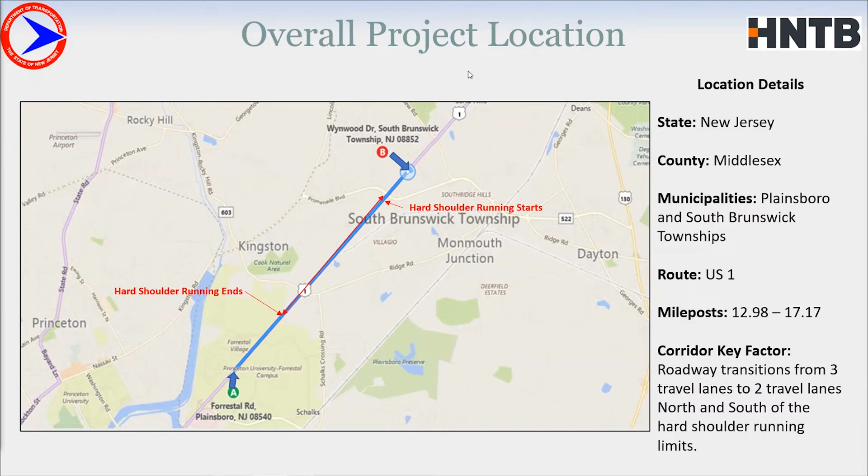With this, now I will give the charge over to Jose to run and describe the next few slides.

Jose, you're next. Thank you, Wasif. Good afternoon, everyone. The problem in this corridor was high congestion during peak periods in this area. This was, as Wasif mentioned, attributed to a bottleneck as the roadway transitions from 3 lanes to 2 lanes, both downstream and upstream of the corridor. There was a need to expand capacity in this corridor, so initial looks at widening the roadway determined it would be too costly due to requiring right-of-way acquisition, utility relocations, both overhead and underground, and the construction itself. Other issues, such as many environmentally sensitive areas, also deterred this strategy.

So other solutions had to be considered to solve the problem. Since the roadway has the 2 travel lanes as well as a shoulder, the hard shoulder running TSM&O strategy was implemented to maximize the use of existing roadway capacity during peak periods to alleviate congestion. Next slide, please.

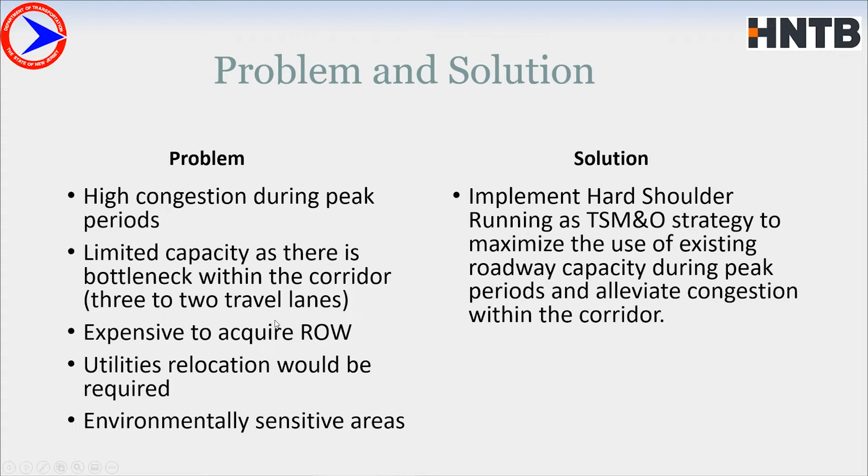There was a high risk of implementing this strategy on the arterial, which has so many entry and exit points, so an initial pilot project was first deployed.

This pilot project allowed the use of the shoulder within the corridor during both AM and PM peak periods for passenger vehicles only. Static signs were deployed advising motorists of the allowable use times and restrictions throughout the corridor.

Due to the high number of driveways on this arterial, signs were also deployed at all exiting driveways to alert motorists of the shoulder use and avoid any issue while exiting onto the shoulder.

Temporary utility pole mounted cameras were installed to monitor traffic conditions and the use of the shoulder during operation. All signals and radar detectors throughout the corridor were optimized for this strategy.

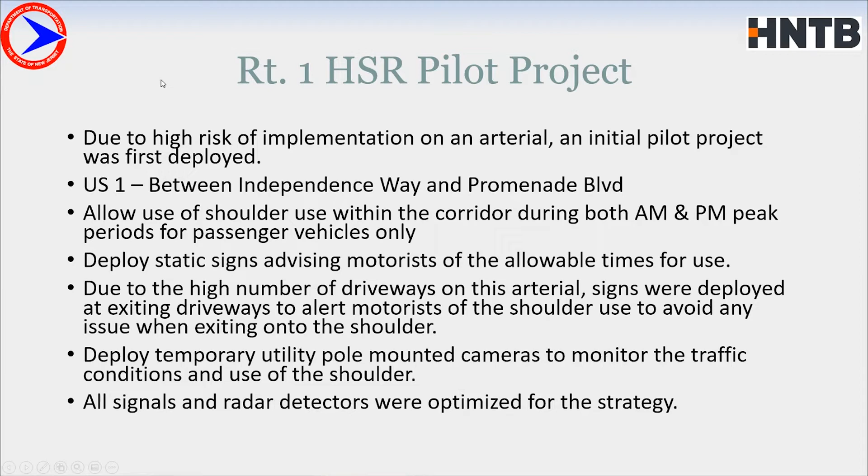A few months after implementation, an assessment of the pilot project showed improvement in conditions. This report represents a before and after congestion analysis during the same time period using data from the RADARS tool.

As you can see, vehicle speeds increased during the peak periods, and the key bottleneck located at Ridge Road saw a reduction in congestion. Travel time decreased during peak periods, as well as delay costs.

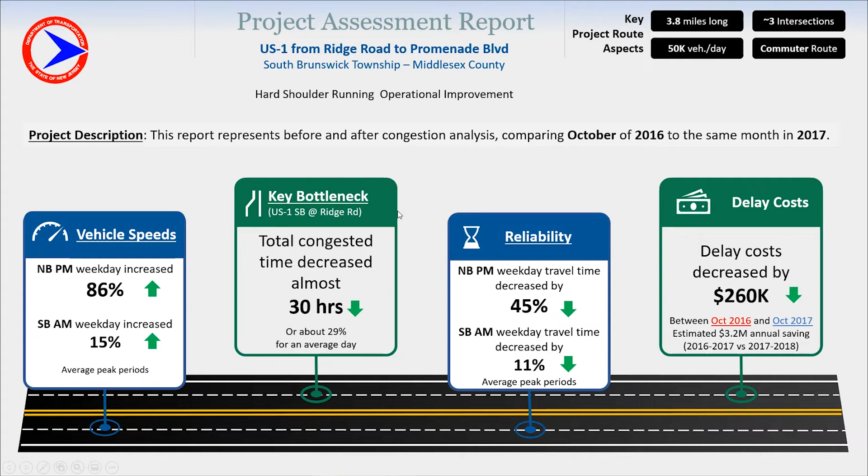Here you can see a side-by-side comparison of before and after the pilot deployment. Both the AM and PM peak periods showed improvement in both travel directions after the deployment.

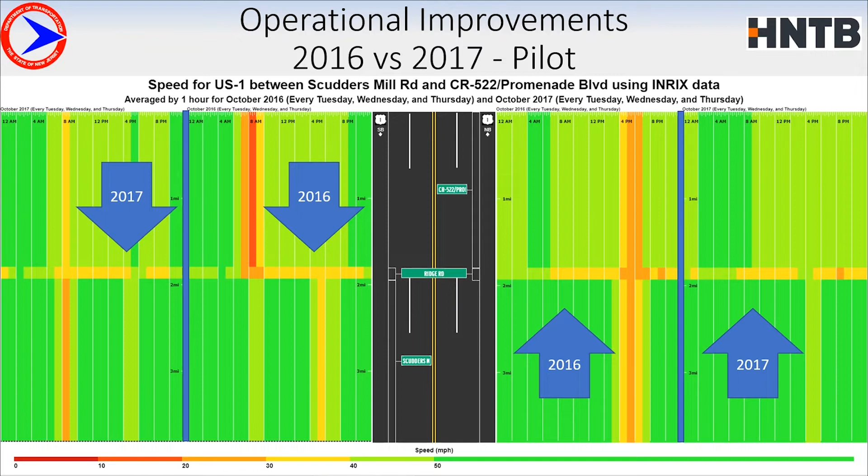Given the success and benefits found from this deployment, it was determined that we would proceed with a permanent solution. My colleague Hiren Kumar Patel will now go over the permanent solution project details.

Thank you, Jose. Good afternoon, everyone.

After having a successful pilot program, we decided to implement hard shoulder running as a permanent solution utilizing ITS devices. The HSR system operates autonomously and is compatible with the existing NJDOT traffic management system.

We decided to provide signage at the advance of the segment, throughout the HSR segment, and also at the end of the segment at constant intervals.

Most of our mobility engineering projects are limited in scope, where we try to avoid impacts to right-of-way, utility, and environment. As a permanent solution, we decided to include lane use control signals, CCTV cameras, and dynamic message signs using our existing fiber communications.

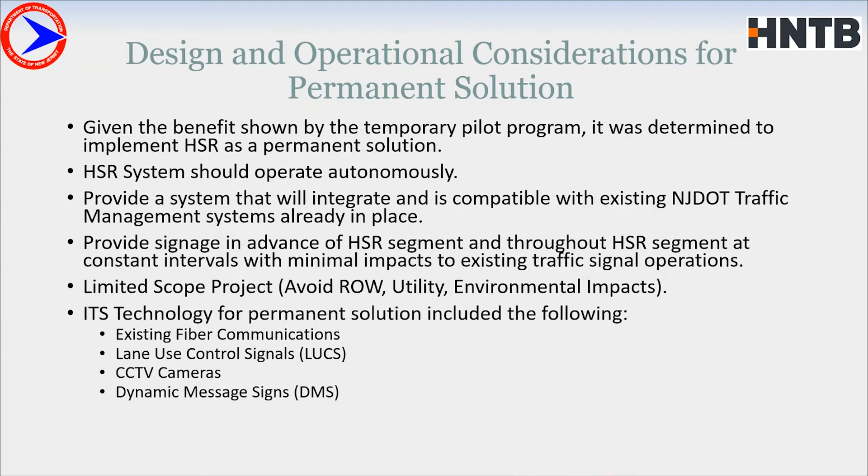Unlike a static sign, lane use control signals provide a clear indication to motorists of whether the shoulder is open or closed. They operate autonomously 24 hours, indicating a green arrow when the shoulder is open and a red X when it's closed.

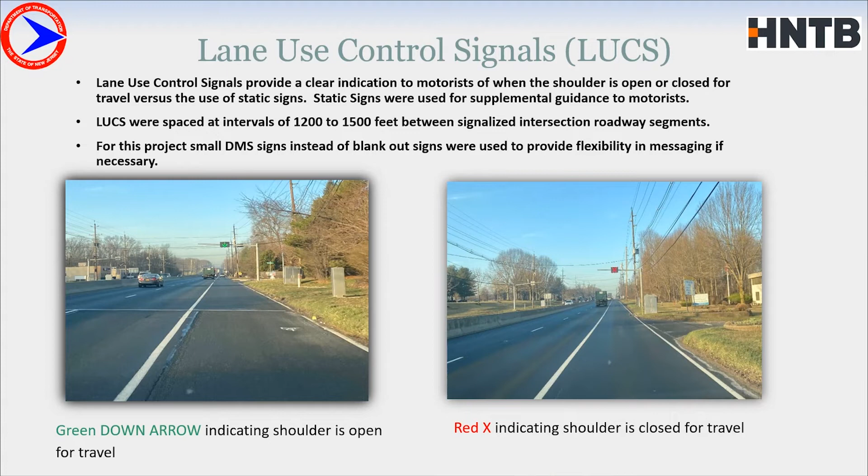LUCS signs were spaced at intervals of 1200 to 1500 feet between signalized intersections. Instead of a blank-out sign, we used a small Daktronics DMS sign, which was easy to integrate into our Daktronics Vanguard system and also provides flexibility in messaging if necessary.

Each LUCS sign includes a fixed pedestal camera on the LUCS side to provide visibility of the shoulder lane at all times and ensure the shoulder is safe to travel for motorists.

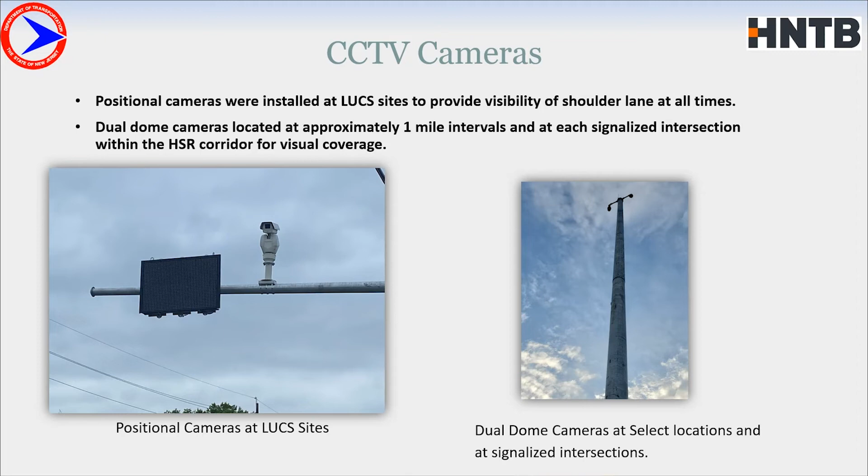DMS signs were installed at the advance and at the end of the HSR segment to provide advance notice for the hard shoulder as well as for other travel incidents. We had to install ground-mounted DMS signs where we had overhead issues.

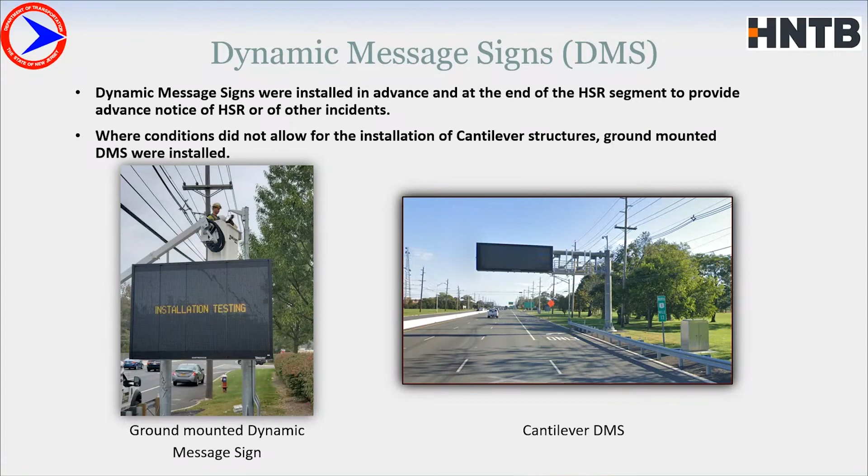Challenges: every project has its own challenges regarding utilities. We either have an overhead issue or an underground issue. In our project, we had to deal with both.

The deployment was on an arterial roadway, with utility poles on both sides, signalized intersections, and, as Jose mentioned, driveways as well. We also had very limited right-of-way through this corridor.

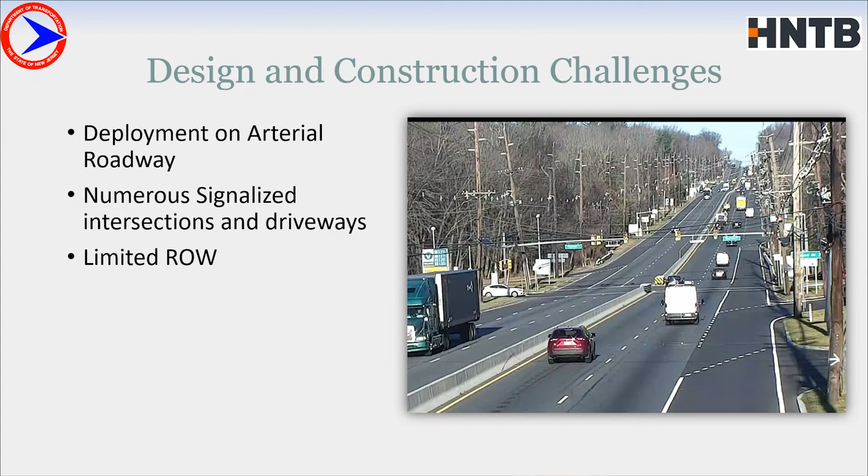As you can see in the sketch, there are a number of overhead utilities, and we had to ensure compliance with OSHA guidelines and our state statute requirements. Similarly for the underground utilities, we met the clearance requirements per utility guidelines.

There were some sites in environmentally sensitive areas, so we had to obtain all necessary permits. During construction, we also encountered sites with shallow rock, so we either had to relocate the site or use special equipment for foundation work.

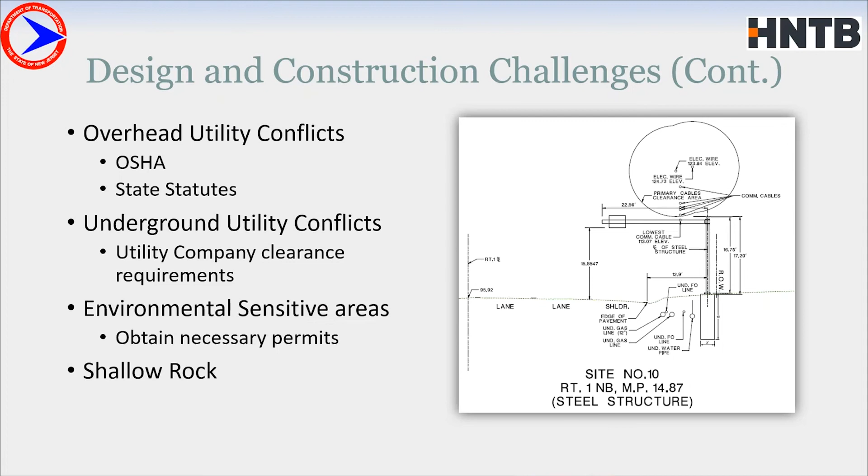In summary, total construction cost was about $5.2 million, and construction length was about 24 months. In total, we installed 14 LUCS signs, 25 cameras, and 4 DMS signs.

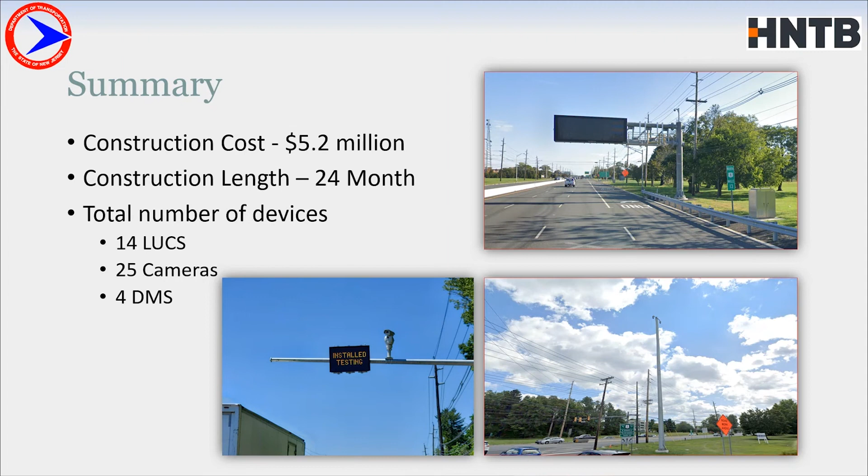These are some additional pictures of the final completion of the hard shoulder running project, showing the LUCS sign and some additional static signs that we installed as part of our project.

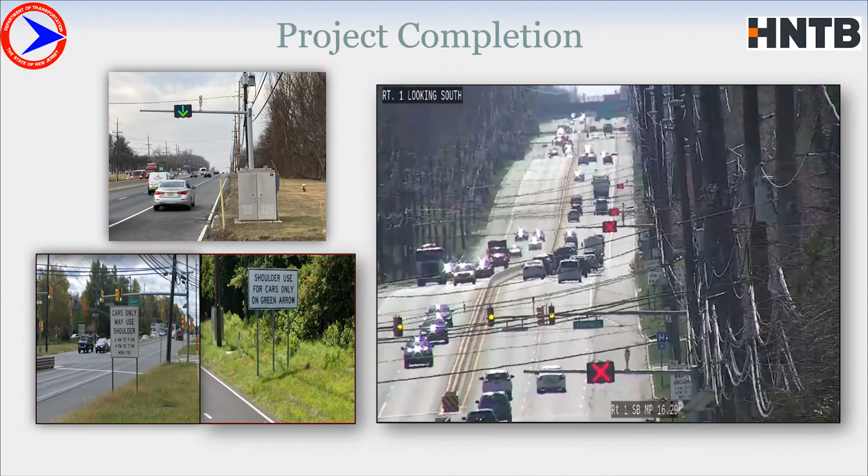With that, I'm going to hand it over to Wasif, who's going to go over the final conclusion of our presentation. Thank you, Hiren.

This slide is generated using INRIX heat maps, and with today's use of Google Maps and GPS, I don't need to describe what the different shades of green or red mean. Green is good, red is bad. The slide describes, using colors, the improvement in travel time by comparing 2016 with 2021.

This is the 2021 data, when traffic was back up to pre-COVID levels. 2016 was the year prior to the pilot project, and 2021 is the latest data. As is evident, there is a significant reduction of travel time in both directions of travel during peak periods.

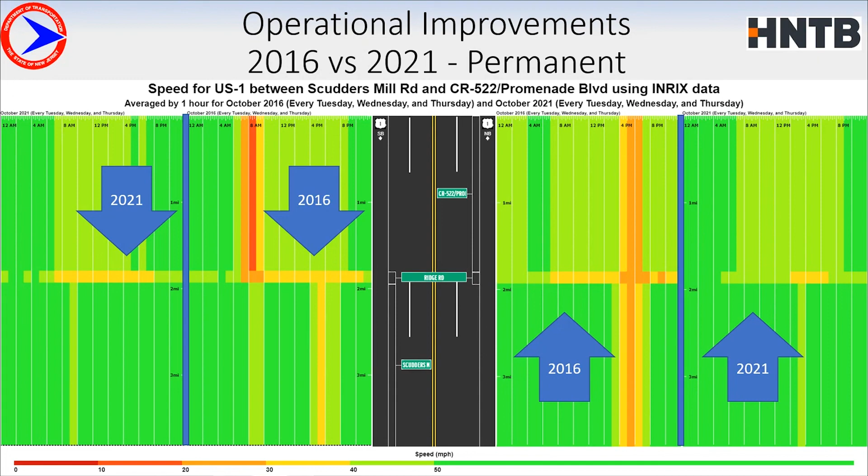We stay in close contact with the local PD, and there has been no increase in accidents related to the use of the shoulder for traffic. With this, we come to the conclusion of our presentation, and back to Adam for any Q&A later on. Thank you.